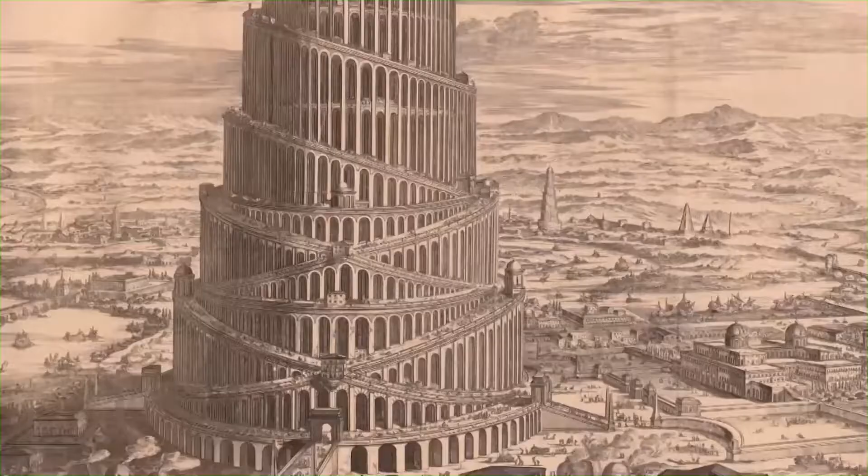Today, the world has 3 mega skyscrapers reaching over 600 meters, physical representations of man's eternal desire to conquer the sky. From the Tower of Babel to the Burj Khalifa in Dubai, the creation of high-rise constructions has been unceasing. Richard Taillé is a physicist. He went around the world to research the subject, asking the expertise of engineers and scientists driven by their desire to reach for the sky.

How were the Egyptians able to build pyramids that dominated the world for nearly 4 millennia? What were the methods of cathedral builders? How did engineers make use of scientific models to design emblematic monuments? Richard Taillé takes us on a vertical journey in the footsteps of those who set out to conquer the sky. To understand how over the centuries men have been able to defy and then master the laws of physics as they build higher and higher.

His investigation of man's race for elevation took Richard Taillé to Egypt. At the edge of Cairo, on the Giza Plateau, stand the pyramids. The Pyramid of Khufu, the largest, remained the tallest structure in the world for nearly 4 millennia. What expertise was available to the Egyptians when they built these monuments? It's a mystery that continues to fascinate scientists and Egyptologists such as Pierre Tallet. With him, Richard Taillé visited the pyramids, the last remaining monument of the 7 wonders of the world.

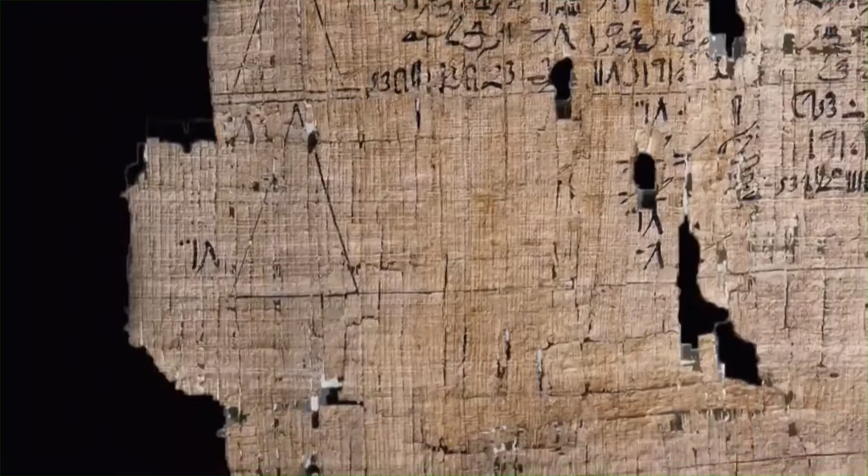We know that the Egyptians had the idea of proportion and used a small triangle. Using that small triangle told them where to place the next stone. The small triangle and the pyramid were similar triangles, as we say today. And this similarity is found in all of the pyramid slopes in the Rhind papyrus.

How can we not wonder what methods were used to build these colossal stone constructions? From the foot of the pyramid, we can really see the blocks. I mean, they're huge. People have an image in their head of armies of slaves working on the pyramids. Is this impression correct? Not really. Certain films have popularized the idea of slave people working on pyramids. Nothing is further from reality. The more documents we find, the more we realize that the work was remarkably well organized by the Egyptian monarchy, and that the workers were craftsmen chosen by the king. They were well fed, well paid, and employed on a yearly basis for their skills.

And according to the American archaeologist Mark Lehner, since it took 2.3 million blocks to build the Pyramid of Khufu, we can estimate that they made an average of 350 blocks a day over the 27 years of Khufu's reign. A team of 800 men is capable, over such a long period, 27 years, of carving all the blocks that made up the pyramid. By making these extrapolations, we've concluded that a team of about 5,000 at the most would have been perfectly sufficient to construct the entire building.

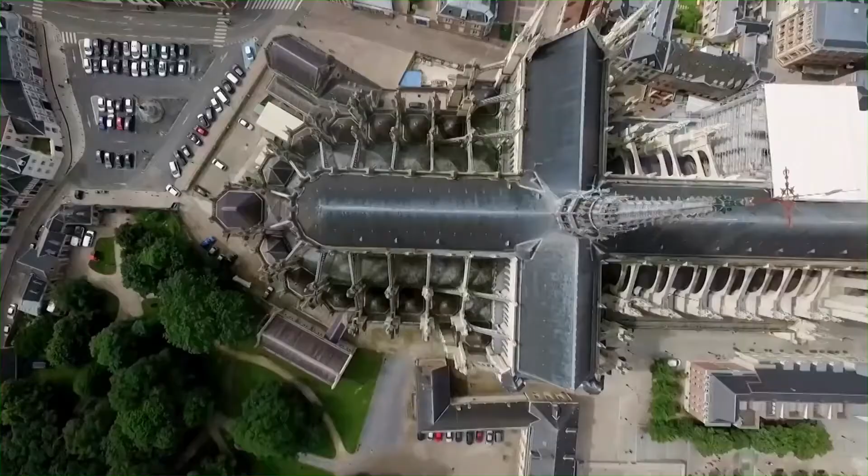As a physicist, when I see the columns, the mass that is above us, I try to reason in terms of force and mechanics. But I imagine that in the 13th century, these notions were not very well known. Exactly what kind of theoretical tools did they have at the time for constructing these cathedrals? In terms of theoretical tools, they didn't have much. Mastery of the compass, the set square, the ruler, very good drafting methods, and the right materials. They used the right stone in the right place.

Empirically. Very empirically. Just by weighing a stone, they knew its density. And they put the heaviest stones on the bottom, the lighter ones on the top. When we make sophisticated calculations today, we realize that these structures are oversized from today's viewpoint because they didn't calculate the size at all. But pillars like this could bear maybe 20 or 30 times the load they currently carry.

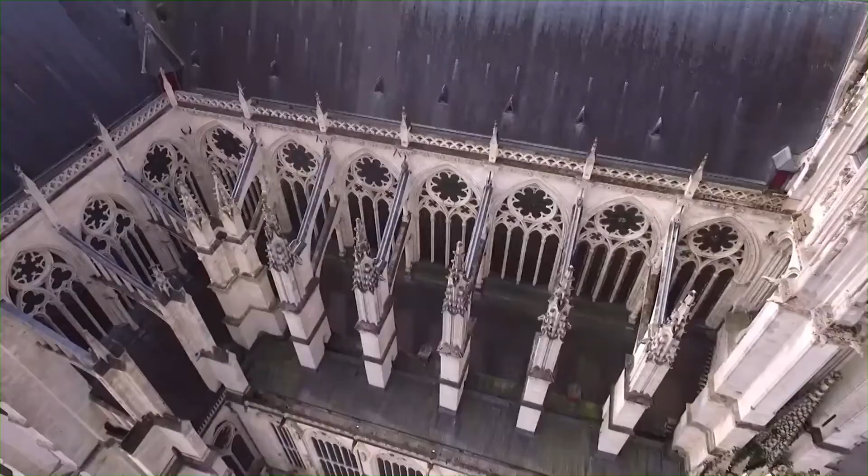Few or no theoretical tools. As for the construction tools like the plumb line or the arithmetic rope, they remain astonishingly simple in light of the scale and the complexity of these stone constructions. Well, let's try one of these so-called rudimentary tools. We're going to make a right angle with this rope that has 13 knots. 13 knots. We're going to make a triangle with one side, that's 3 units. 1, 2, 3. 4 units here. 1, 2, 3, 4.

So if we calculate this on paper using geometry, a triangle with these proportions should have a right angle here. It's the Pythagorean theorem, but the medieval constructors didn't know this theorem. However, they knew that when a triangle has one side that's 3 units, another 4, and another 5, it's a right triangle. So that gives us a right angle. And it can also help to make horizontal lines. If the vertical line here is aligned with this side, it means that the bottom is horizontal.

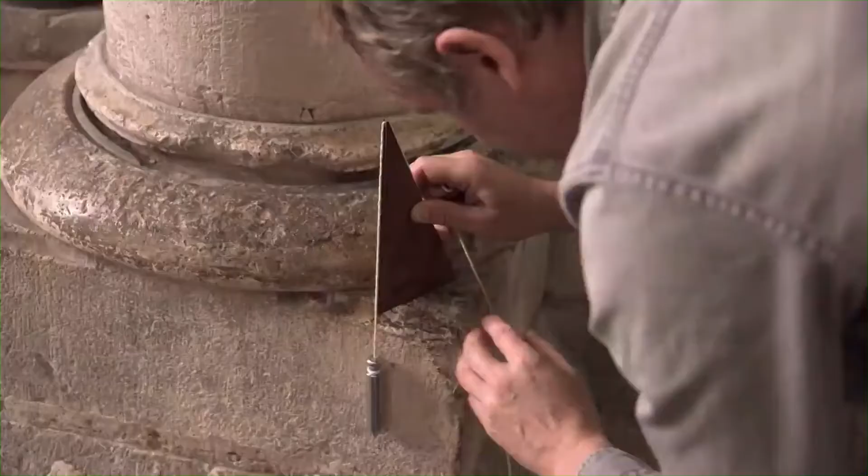Yes. Let's try. I'm a little intimidated. It's my first time using this medieval tool. Here we go. I'm putting it on the surface. And yes, it's horizontal. It's remarkable. So I tested the horizontality of this part of the cathedral. The builders did a good job. We can see that they managed to build something massive and durable using a relatively simple tool. And that 800 years later, with maintenance, it has remained sound.

But not all cathedrals have been so lucky. A few kilometers away, Saint-Pierre-de-Beauvais has had a turbulent history. It should have been the highest cathedral in the world, but the builders' plans were foiled by the laws of physics, leaving it unfinished. Jean-Lucien Guenon is the heritage officer who watches over it today.

So we're entering the cathedral at what should have been the main entrance if the nave had been built. And we can see the size of the aisle and the choir with its Gothic architecture in front of us. The Bishop of Beauvais, who decided to rebuild the cathedral in 1225, wanted it to be the most magnificent, tallest, and largest cathedral in Christendom. So the vault is 48.50 meters high, the tallest vault ever built.

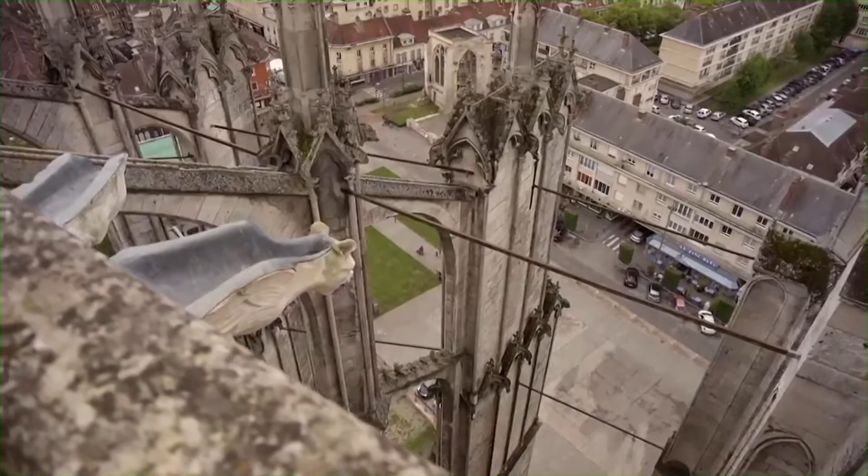At the time, Saint-Pierre-de-Beauvais benefited from advanced technology. It was reinforced with iron. Its arches were supported and bound together with metal tie rods, but this precaution would prove insufficient.

The choir suffered some unforeseen events. It was completed in 1270. 50 years of construction. And in 1284, some external flying buttresses broke, causing certain arches to fall. It didn't completely collapse, but nevertheless, as a precaution, the reconstruction included a new column in each span.

And that's why it's a very small space. So 3 new columns were added, in between the 13th century columns. All right. Each arch is therefore divided in 2 and supported by an additional column.

We're going to see the upper parts of the church now and look at the tie rods more closely. The stairs are very steep. Here we are. Okay.

We have a good view here of the cathedral's 13th century architecture and the differences between the original structure and the reconstruction that took place in the 14th century. So we can see this buttress column that is very streamlined, but has a large surface area for the wind.

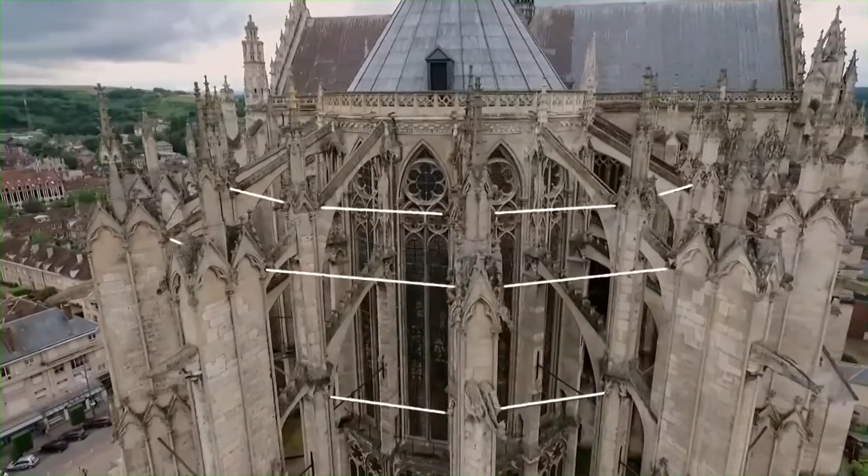And if we move forward, we see the structure of the tie rods. They're iron bars that crisscross. They're iron bars that connect everything so that the structure is held together if there's movement. Okay, it keeps everything in place. The continuity of the chain is the important thing. One wouldn't be enough.

The evolution of Gothic architecture, with its unprecedented successes and spectacular catastrophes, is studied in many universities, including the United States. Richard Taillé headed to New York. He went to meet with researchers from Columbia University who are studying French cathedrals using modern scientific tools and have created an index of all of them.

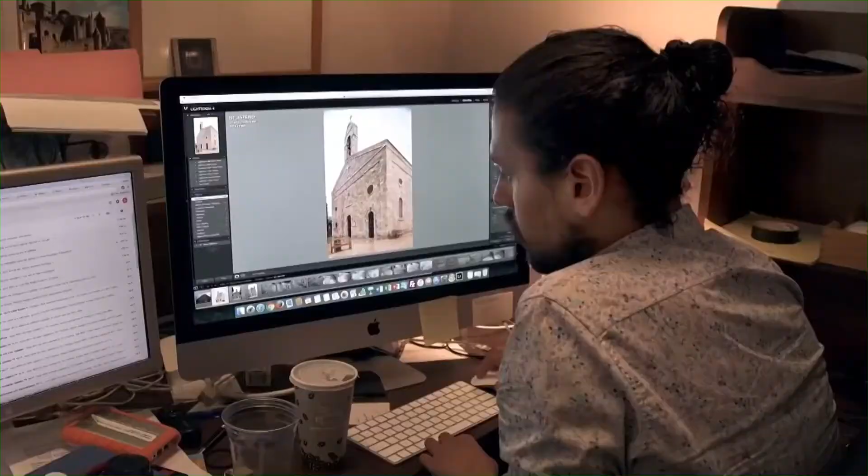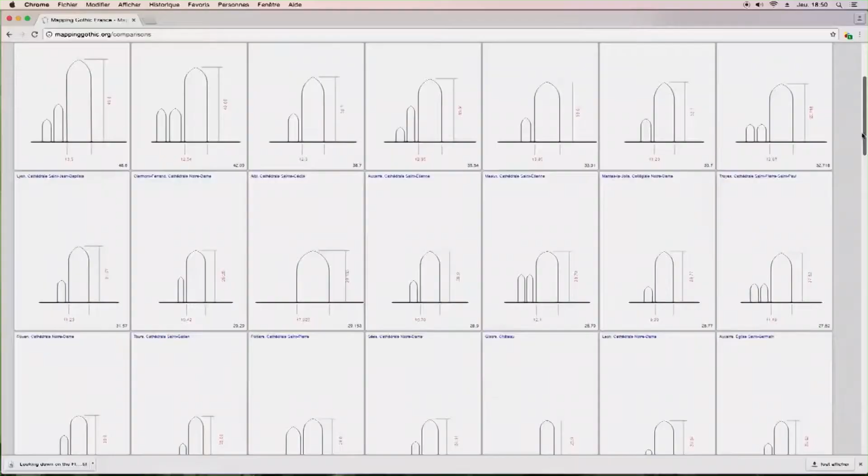Stephen Murray and Rory O'Neill have developed digital tools to better understand Gothic architecture, first off with a huge database called Mapping Gothic. What's particularly interesting is here that it's arranged by nave height, but we can also arrange by approximate construction start. So here, okay, this shows the height.

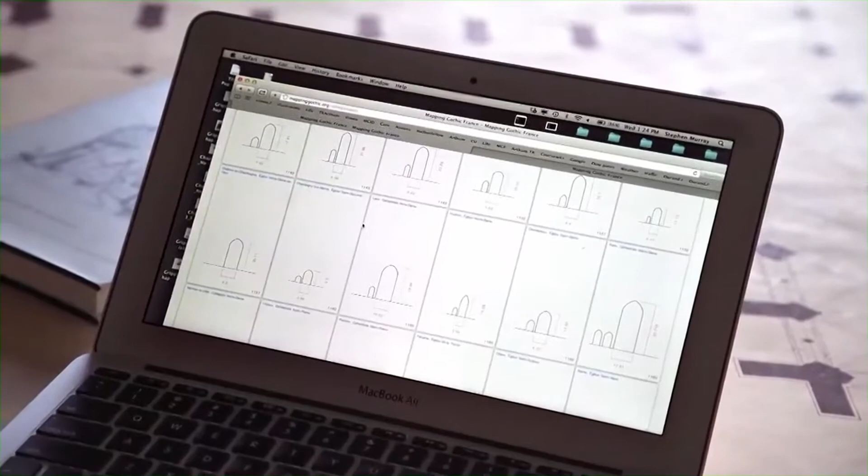So here we are in the year 1000. One can look at the heights of buildings changing, and you don't see a huge amount of difference in them. The great breakthrough of all the cathedrals is Notre-Dame de Paris, and it was the first building in Northern Europe that goes beyond 100 feet in height. Amiens, 1220, and here comes Beauvais, 1225.

Why did it happen at that particular moment? I would suggest the answer is not simple. What you're dealing with is a period when the clergy, the bishop, are receiving huge amounts of money from agrarian production and industrial production in the cities and mercantile exchange. So to make a building very tall like Amiens or Beauvais, the technology was possible only because they had the resources to do it.

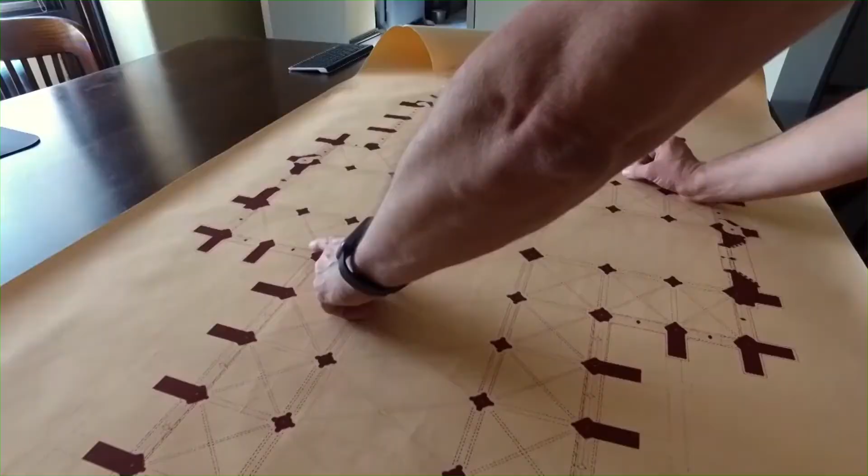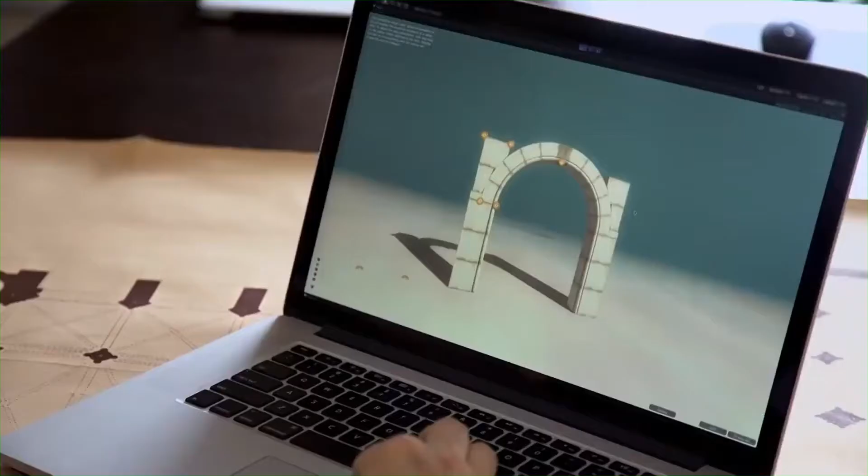To experience in real time the challenges of the cathedral builders, Rory O'Neill developed a digital simulation, a sort of scientific construction game. Yeah, the relevance here is to build an appreciation, an intuitive sense of what the builders were challenged with. They wouldn't be sure of how the blocks would behave until they put them up there. And so we can put them up there more quickly in this simulation because each block is behaving as it would. So we have the ability to vary the sizes of the blocks and their configuration in real time.

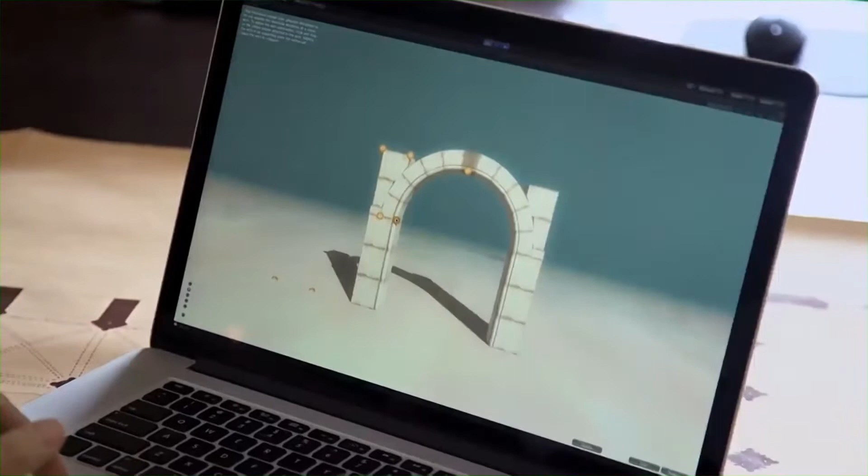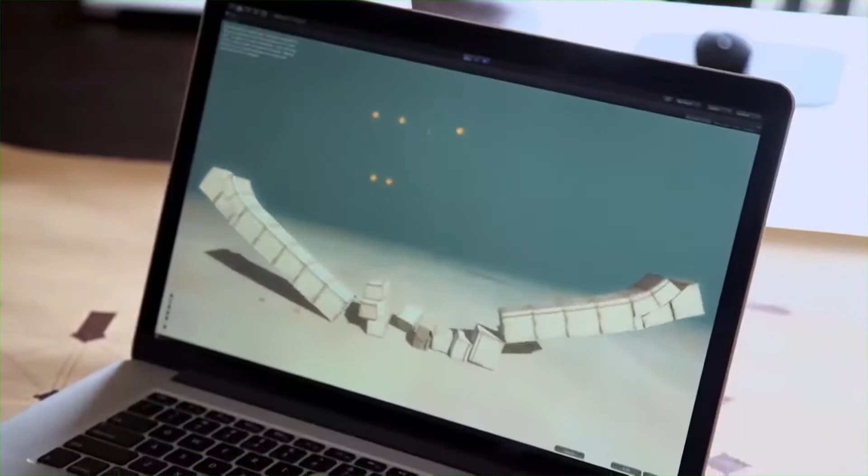As we try to make this structure taller, we've got the same outward force with this trying to fall and pushing these out, but because these are taller, it's got more leverage to push these things apart. Okay. And so height, the quest for height here, is limited to some extent by the ability to vault the space. So what we can do is certainly add more support on the sides, more buttressing. This holds? And this holds.

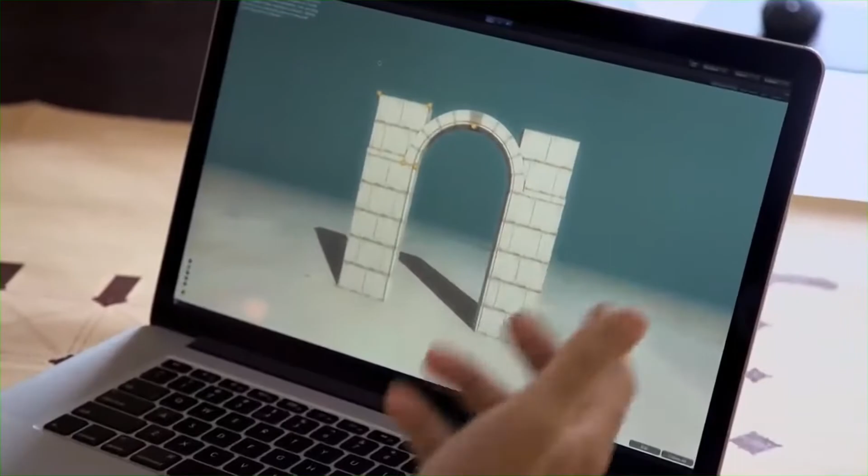Okay. But this is expensive. Here we've got a lot more stone that has to be quarried. It has to be brought too. Well, somewhere Islamic builders came upon the idea of breaking the arch.

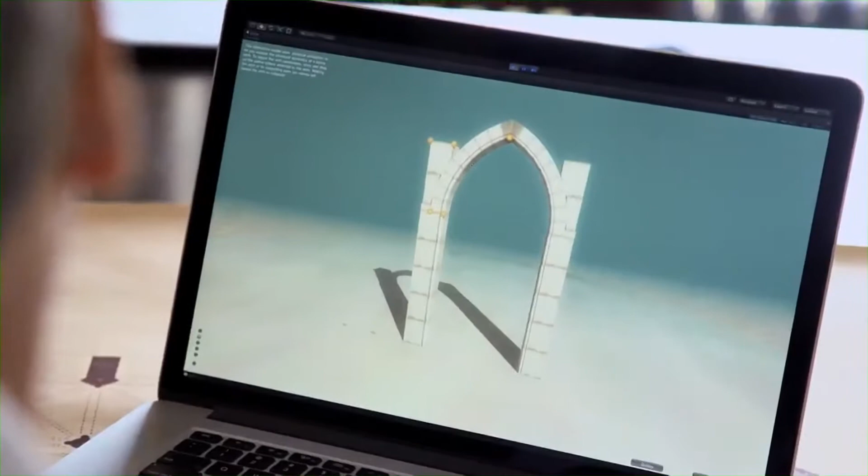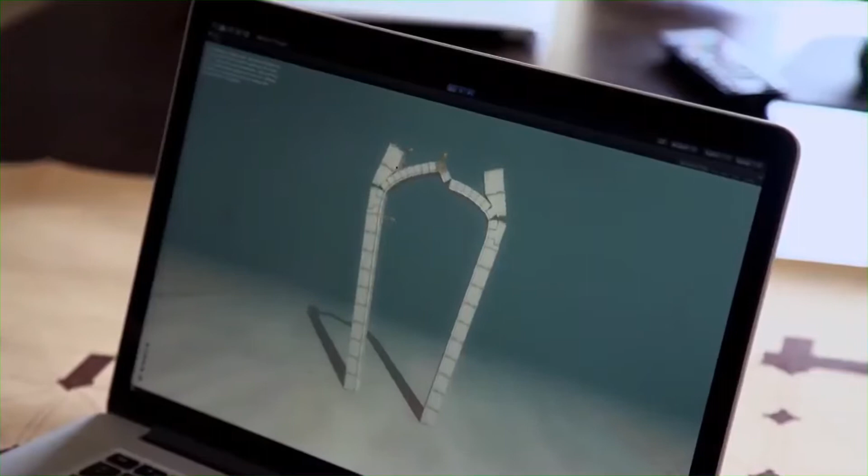A broken arch, an arc brisé. Arc brisé, d'accord. And whether or not this was done for aesthetic reasons or structural reasons, we don't know. However, it does help. Yeah, it works. Because it's bringing the load more directly to the ground. And certainly, because of the structural benefits, we can start going a little higher and try to make this taller and taller. At some point, this will also fail. So everybody stand back. So here we've got a failure of the structure in static loading.

But as we get larger to hold more congregants, a growing city, we need to come up with some other solution here, what we know as flying buttresses. So I think maybe even you could give it a try. Okay, let's go. It's Richard's turn to try his hand at cathedral building and to experience the humbling challenges of the quest for height.

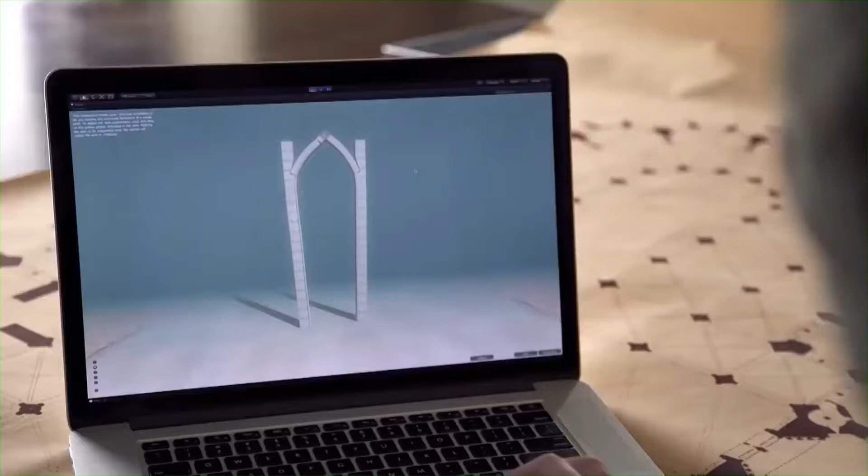Et avec moi, enfin, je... I don't want to brag, but mine's holding. Oh là. J'ai parlé un peu trop vite. Okay, I spoke too quickly. Celle-là, elle tient pas très... It didn't last very long.

Even seismic engineers today are still learning from these masonry structures because their simulations are not as accurate as the buildings themselves. So for the most part, seismic engineers are looking at these medieval masonry buildings to learn how to build better today. For several centuries, the race for height remained the domain of the sacred. The highest cathedrals in the world, Ulm at 161 meters and Cologne at 157 meters, both in Germany, would only be completed in the 19th century.

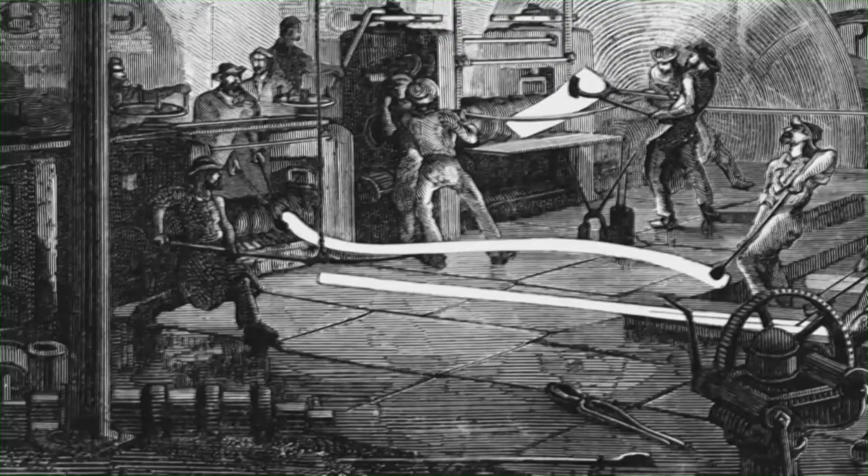At the beginning of the Industrial Revolution, the concept of technical prowess surpassed that of religious will, giving new momentum to the conquest for the sky. The engineers performed what were miracles for that time, exploiting new materials. The steel industry was rapidly developing. First iron and cast iron, then steel, would become the primary metals used in construction. Soon, the first skyscrapers were born, thanks to a tragic incident.

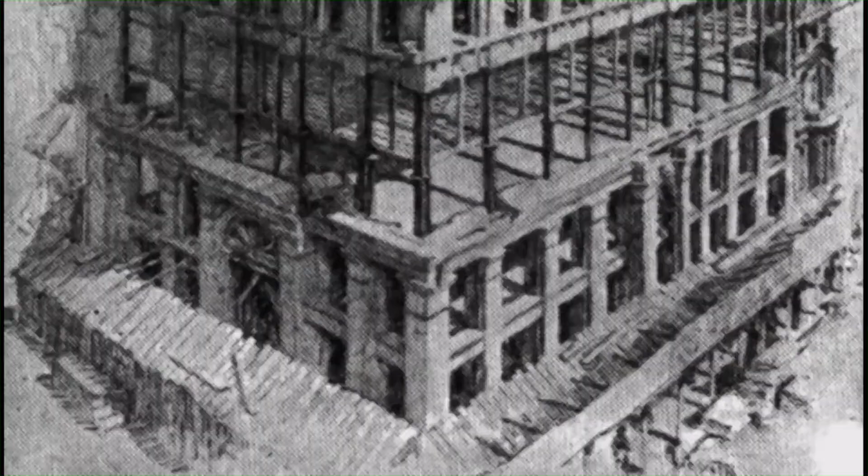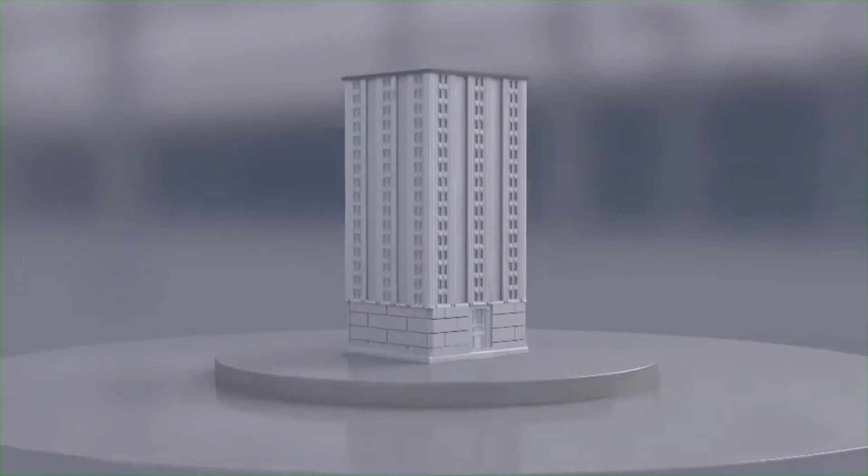And so the first skyscraper was born, the Home Insurance Building, designed by the architect William LeBaron Jenney. He said that his goal was a height to rival the Tower of Babel. But apart from the height, it was the construction technique that was truly innovative. In traditional masonry, the load of the structure is supported by the walls. The more height, the greater the forces that are exerted. Hence the need to build thick walls. For example, a 16-story building in Chicago has walls that are 1.8 meters thick at its base.

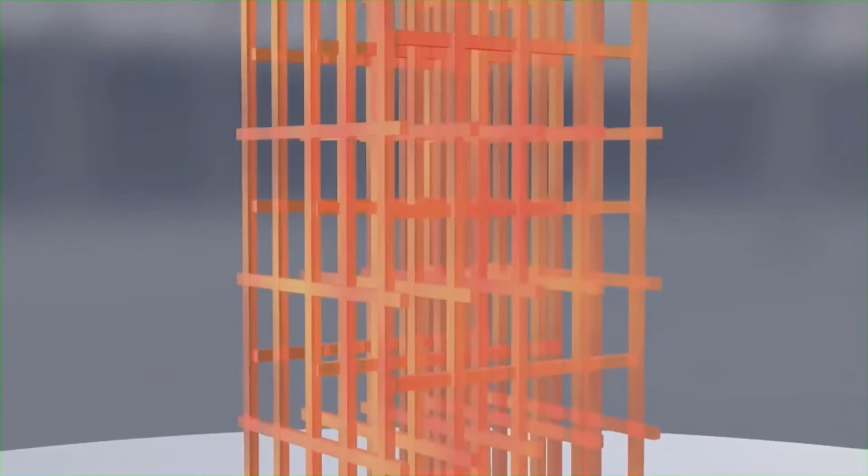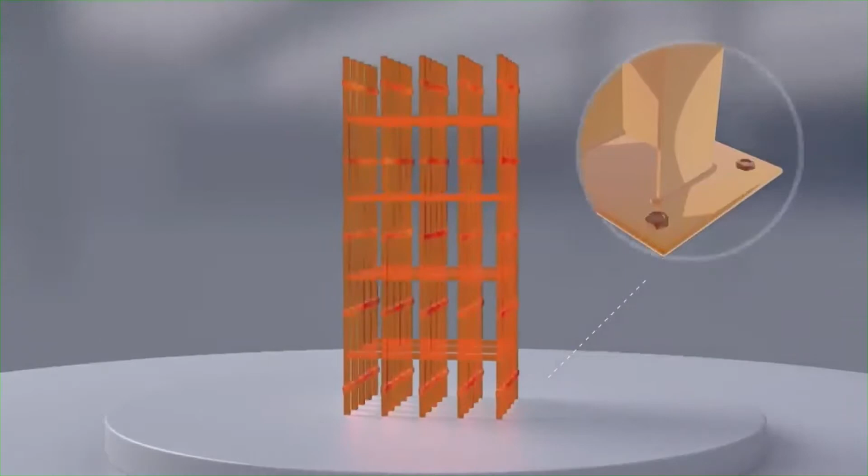But thanks to the invention of the metallic structure, buildings were able to become lighter and therefore higher. Traditional masonry was replaced by a skeleton of metal girders with the framework connected by rivets. This supports the weight of the building and allows the entire structure to be lightened considerably. Thanks to this new technique, man would be able to set new records in its conquest of height. There was much new terrain to conquer, and soon a rivalry began in the United States.

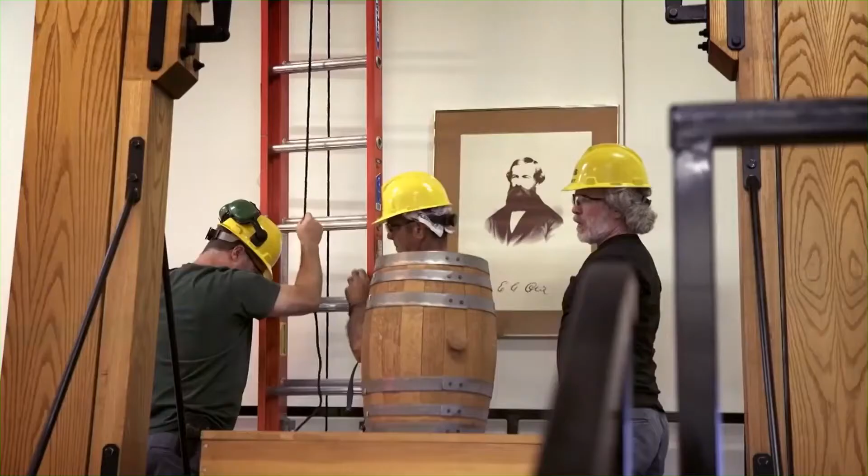None of this would have been possible without a crucial invention, the elevator. Elisha Otis, an engineer, made the discovery around 1850. Here it is, the test tower. To find out just how revolutionary his methods were, Richard Taillé went to the Otis Research Center in Connecticut, where he had a historical experience. 28th floor.

Welcome. Bienvenue. Bonjour, merci. Richard. I am Rick. Okay. You'll need to wear a hard hat, safety glasses. How do I look? Wonderful.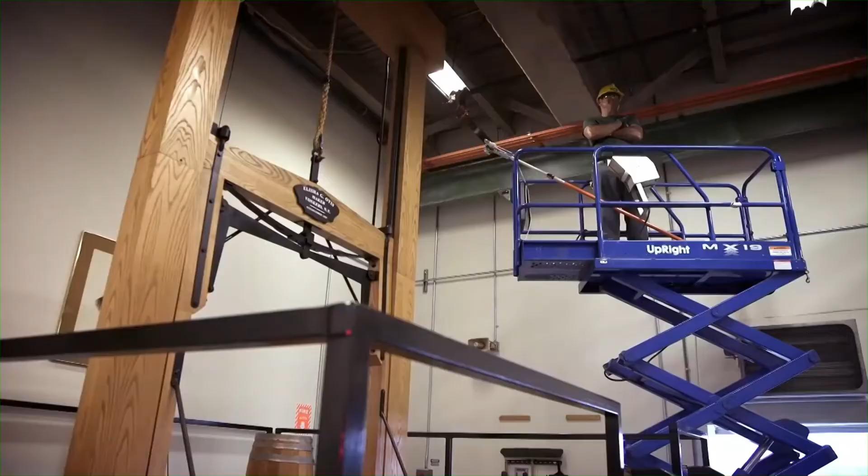Très bien. Well, I didn't expect to see a wooden device like this here in the middle of this big tower. So that's actually an elevator. This is an actual lift. In 1853, elevators were used for freight goods. Okay. And if the rope broke, the platform with the goods would fall, damaging the materials being manufactured. Elisha Otis, who was the building engineer, said there has to be a better way. How can we prevent the platform from falling?

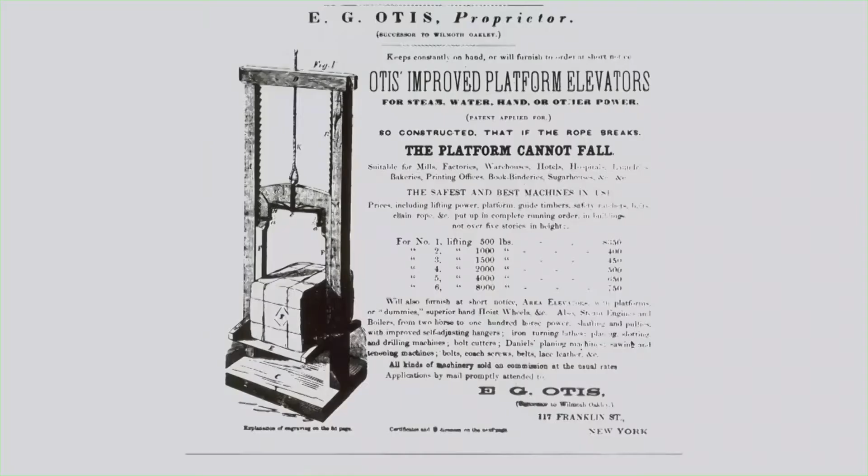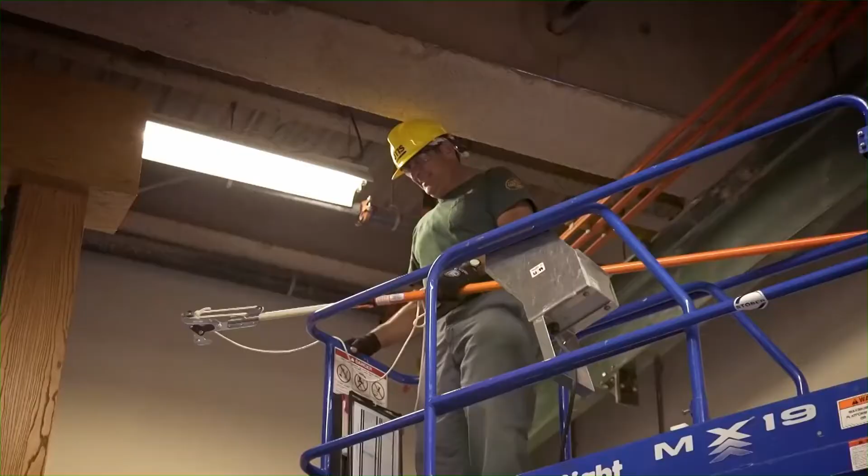So if you look here, you can see the spring. That came from a wagon. Okay, so he took something that already existed, the mechanism that has been used in trains. Yes. And what he developed was an ability to stop immediately the platform falling down if the rope broke. Would you like to try? Yeah, let's go. Here? There you go. Okay. So let's raise the platform. Right, so that's pulled these two in.

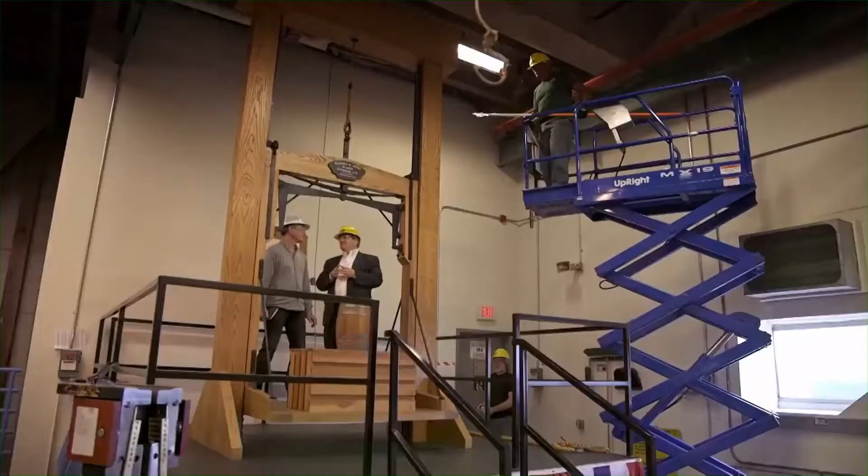Okay, here we are. We say cut the rope. The tension will be released. It'll push the pawls into the ratchets, and we're going to come to an immediate stop. 3, 2, 1. Cut the rope.

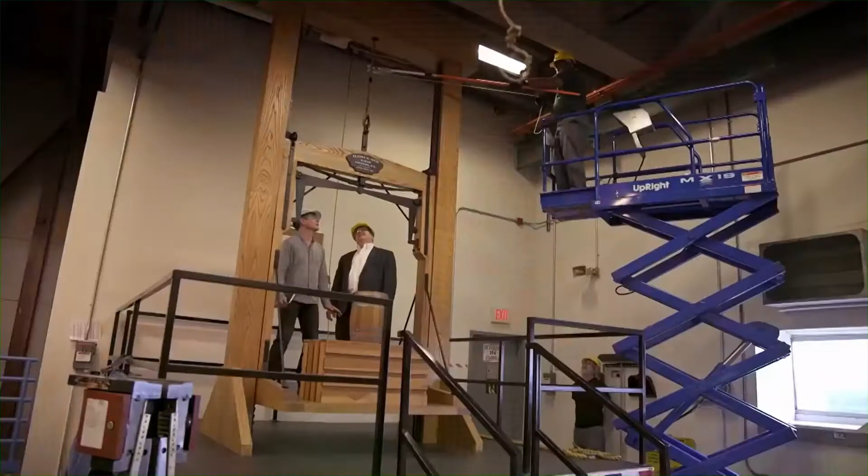Wow. I felt it on the knees. Yeah, absolutely. So in 1853, when Elisha Otis had his assistant cut the rope, he doffed his hat and said, "All safe, gentlemen, all safe."

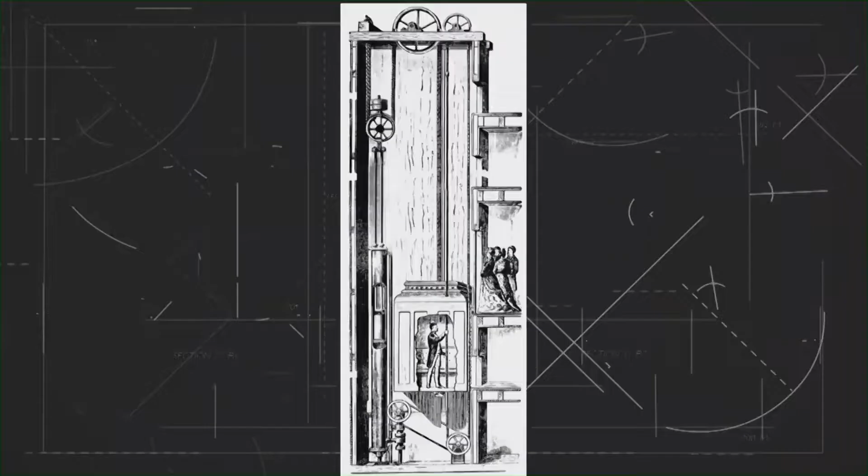4 years after this impressive demonstration, the first passengers would confidently ride in the elevator that Elisha Otis installed in New York. Elevators remain the subject of intense research today, but they have allowed, since their invention, the true conquest of the sky to begin. A bitter competition where science clashes with pride.

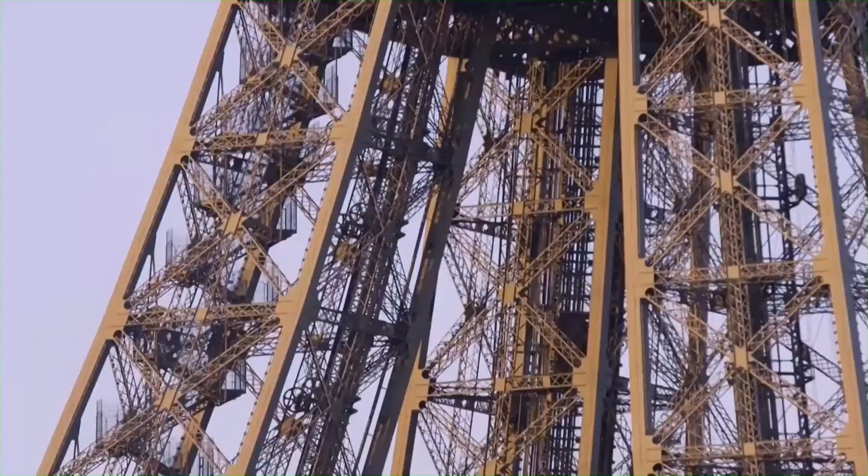Five years before the World's Fair, which was to mark the centenary of the French Revolution, Gustave Eiffel and his engineers had the idea for a 300-meter tower that would represent the country's rediscovered power and demonstrate its technical prowess.

Hello, Monsieur Lemoine. Hello, Richard. It's nice to meet you.

Likewise. So you're a specialist of the Iron Lady. Here's this beautiful tower shining under a blue sky on this clear and sunny day, which brings out its graphic lines, its lightness. The structure is 300 meters high, making it the tallest building in the world when it was built in 1889. It was really a visible marker of the technical and scientific accomplishment of the 19th century.

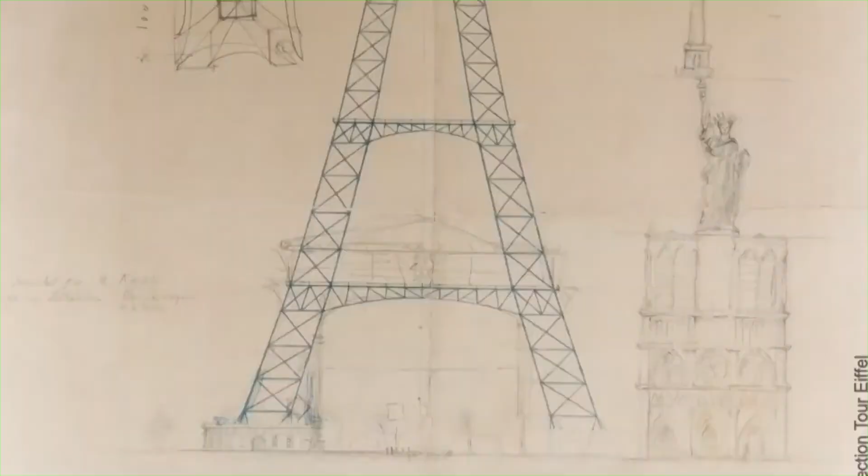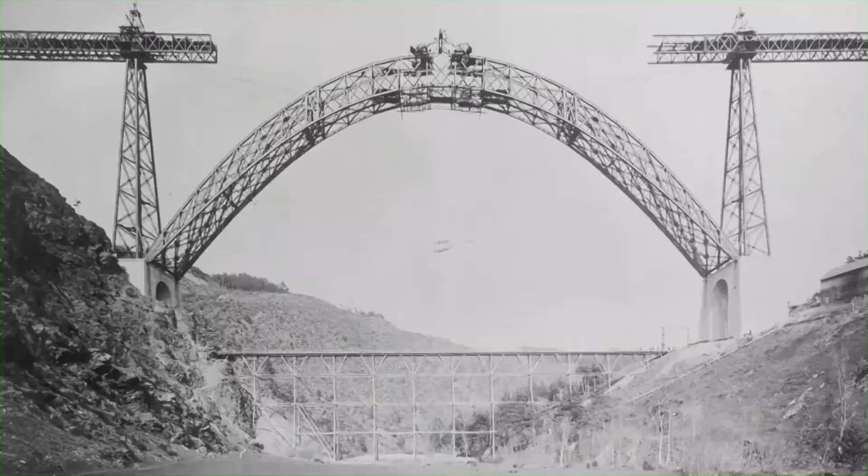And how was the Eiffel Tower designed? Was it an idea that came from Eiffel? Or was it a commission made for the exhibition? The tower was conceived by two engineers, Émile Nouguier and Maurice Koechlin, who brought the idea for a 300-meter tower to Eiffel in 1884, based on the bridge columns that the company already knew how to build. This would, of course, be both the highlight of the Universal Exhibition of 1889 and also the great achievement of his career.

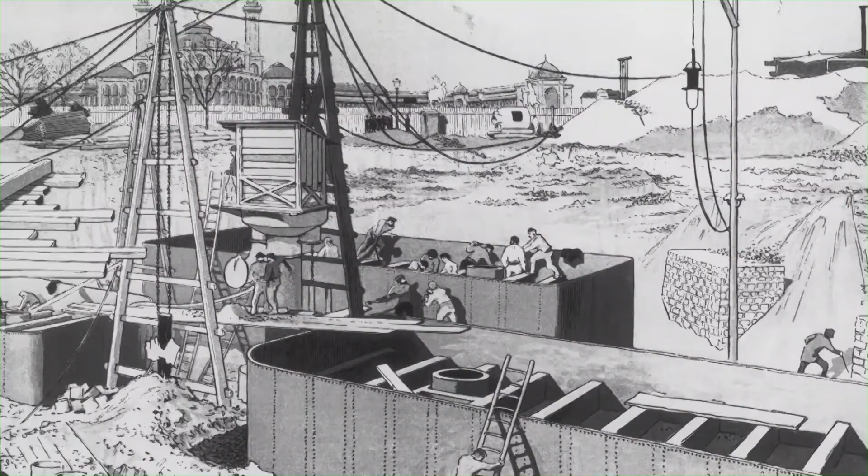So now we're at the square under the columns. We can see that they're leaning inwards. How did it stand up before the first floor was built? The challenge was to start the tower. They began by building foundations, and then the slanted columns. To hold them up, they just used wooden scaffolds, the same that were used when building cathedrals. They started with 4 columns, and it rose from there. The critical point was reaching the platform area on the first floor.

We shouldn't forget that they were assembling sheets of metal pierced with holes, which had to be adjusted precisely before putting in the rivets, down to the millimeter. From there, it was a kind of giant meccano that could be gradually assembled. In less than 2 years, the tower was built, to everyone's surprise. Let's go and take a look from above. Let's go up.

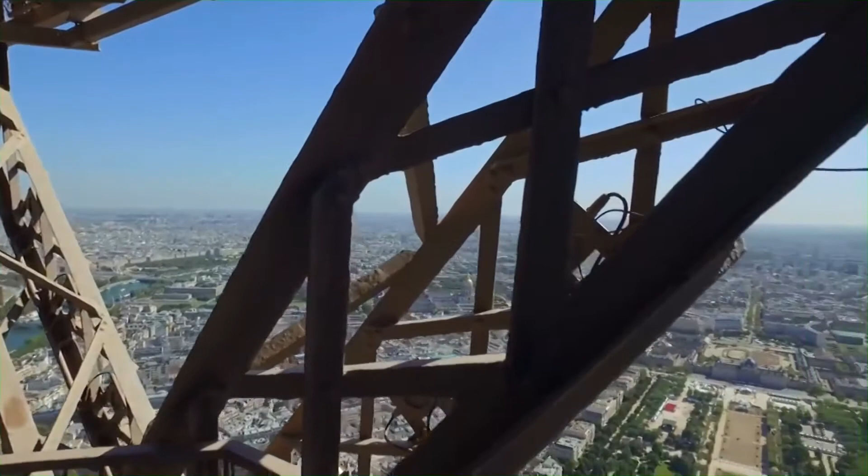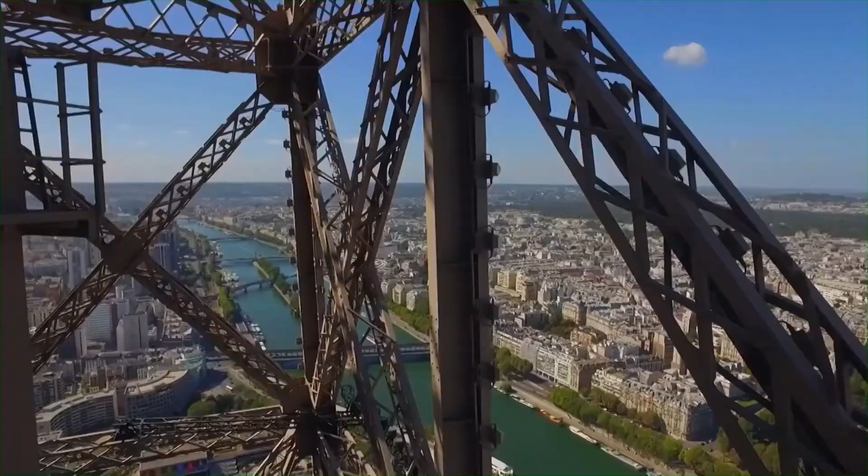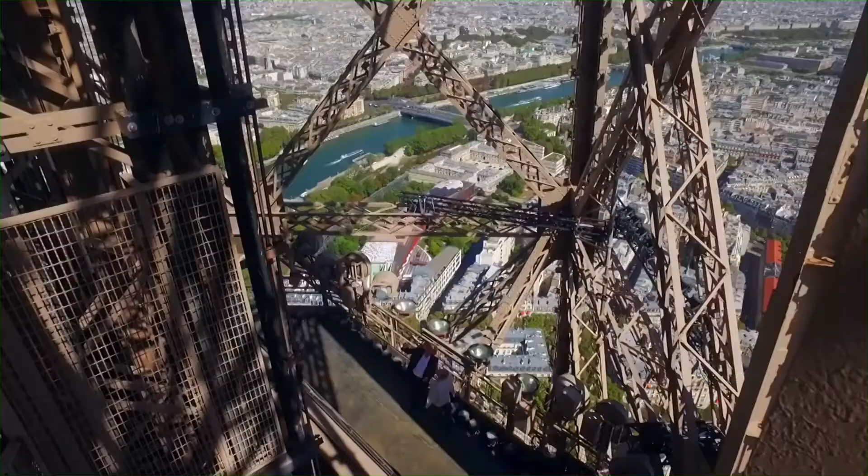Here we see the structure really well. A view of a void. We're in between the second and third floor, about 250 meters high, and we see that there's not much holding the top of the tower. There are open-work girders. In total, the tower weighs 7,300 tons. It's very lightweight for a structure of 300 meters. But it has been strategically designed to withstand the wind.

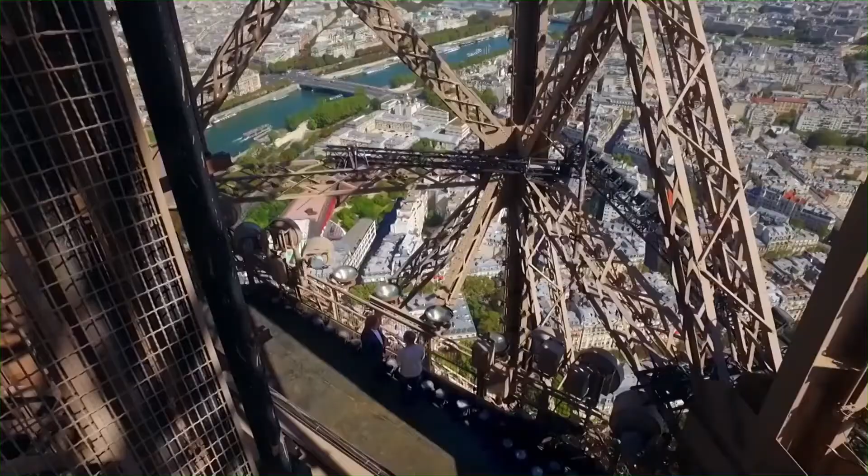The wind creates pressure, several hundred kilos per square meter, which could topple the tower. So they gave it a slightly curved form, which causes the horizontal force of the wind to combine with the vertical force of the tower's weight, giving a resulting force exactly in the axis of the columns. So the shape doesn't come from the architect's imagination, but from a mathematical calculation. The shape comes from mathematics, but that's what gives the tower its visual identity, precisely because it's inspired by scientific studies and not by the classic rules of architectural composition. Okay.

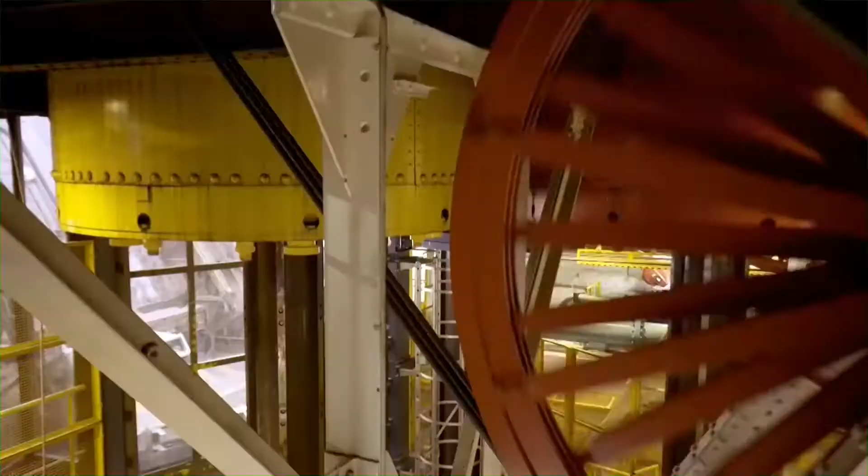From June 1889, visitors to the tower could safely reach the top thanks to elevators, a real technical feat at the time. Here we go, we're going all the way to the top, from the second to the third floor. We have an incredible panoramic view from here. For 40 kilometers away, it is stunning.

So in 1889, Parisians could come here and see the very same view. For the first time, they had the chance to go up 300 meters in the sky, and it was a real novelty. And it wasn't just a small group of people who came, but 2 million people. And they weren't afraid to climb to the top of this great iron tower? It was a very unusual opportunity. They weren't familiar with mountains or altitude.

A lot of people must have had vertigo, but it was also perhaps a way of warding off their fear, saying to themselves, I'm 300 meters high and I'm safe on this small platform. It showed that one believed in the idea of progress, which was strongly valued at the time by all of the citizens. In any case, I feel safe on this platform. No problem. I'm not afraid of falling.

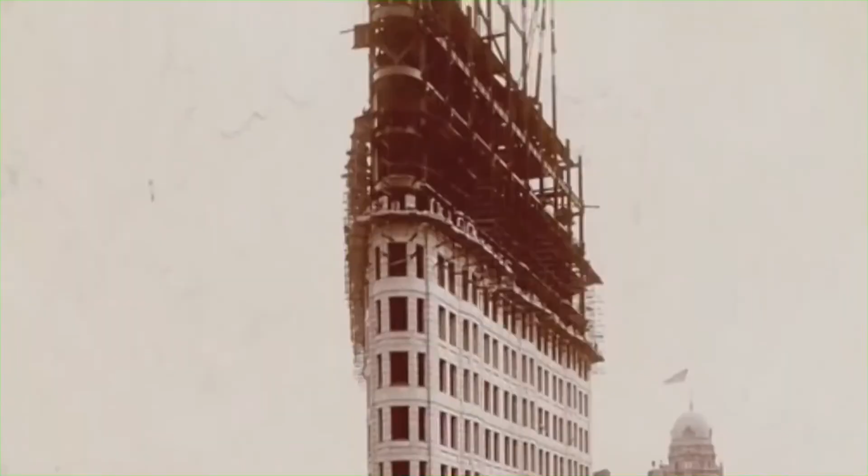So it's a building that comes to a point like a lady's iron, although we might call it a piece of cake. Yeah. A very tall piece of cake. But I guess it's not a piece of cake to build. No. That was a nightmare for engineers to work on. The problem they had was the site, trying to get the flanges to work on this narrow corner. But this is a skeleton steel construction with terracotta fireproof design and cladding. So this is a full skyscraper. It has all the characteristics that are needed to make what we come to call, after the 1880s, a full skyscraper.

From the early 20th century, every bank, newspaper, and insurance company wanted its own skyscraper. It was a way of gaining exposure for their brand and asserting their reputation with a powerful symbol. Buildings of greater and greater heights sprung from the ground until one of them came to dominate the world for quite some time. We're on Fifth Avenue, 34th Street is here, and right up there is the Empire State Building, the world's tallest building for many decades.

Wow, what a beautiful lobby. And what about this picture here? Now, this is wonderful. A big image of the building itself. There it is. A building that sets back under the zoning law of 1916 in a very dramatic fashion. In 1916, after 20 years of people arguing about how big these buildings are, New York City passed a zoning law which basically says that the building starts with a base, sets back at a certain mathematical formula, goes up and allows people to still be bathed in light and not feel that they're down in an elevator shaft.

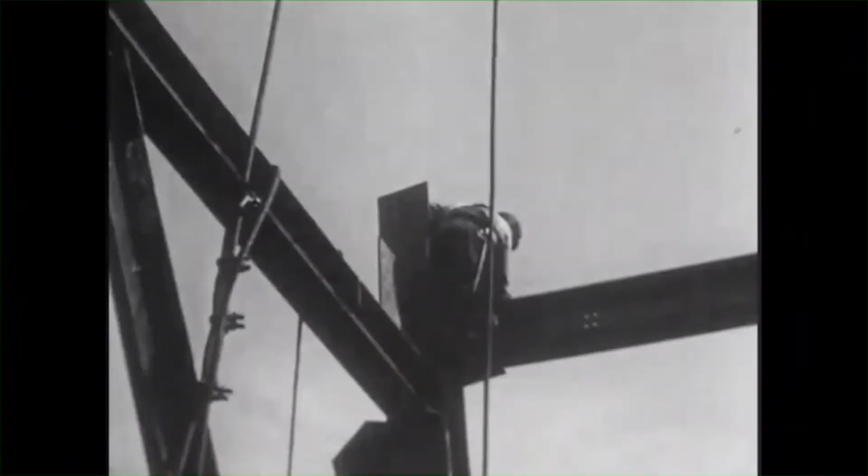The Empire State Building, with its distinctive silhouette, is the ultimate model of the 1916 law. And it was built at the frantic pace of 4.5 floors per week. It was a construction nightmare. And you know, it involved riveting huge girders in the middle of the sky, looking out on nothing. Now, I don't know whether you've ever seen the... Oh, pictures of the construction workers. The thought of it terrifies me. But the special people who do it are Mohawk Indians from Canada, and they were able to get out on those girders and do it.

And this building was finished in 18 months. It was finished May 1st, the traditional moving day in New York City. The building was ready on May Day, 1931, and the building flopped. That initial commercial failure did not, however, prevent the 381-meter-high Empire State Building from remaining the tallest skyscraper in the world for 4 decades.

One of the defining features of the Empire State Building is that it is mainly constructed from concrete, a 19th century innovation that gradually came to replace brick and terracotta. This material made it possible to reach heights that were unimaginable even a few years prior. Along with steel, concrete remains the primary material used in the construction of high-rise buildings today.

The higher a tower rises, the more it is subject to external forces, compression, traction, bending, twisting, and shearing, exerted mostly by the weight of the structure on itself or by winds exceeding 200 kilometers per hour. When subject to pressures that are too great, towers can bend to one side, swinging back and forth, twist in on themselves, and end up collapsing. So they have to be constructed with materials that can absorb these movements.

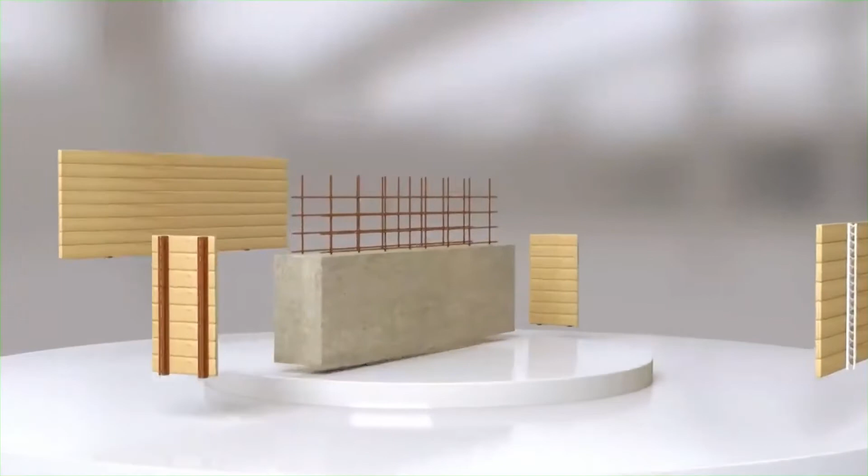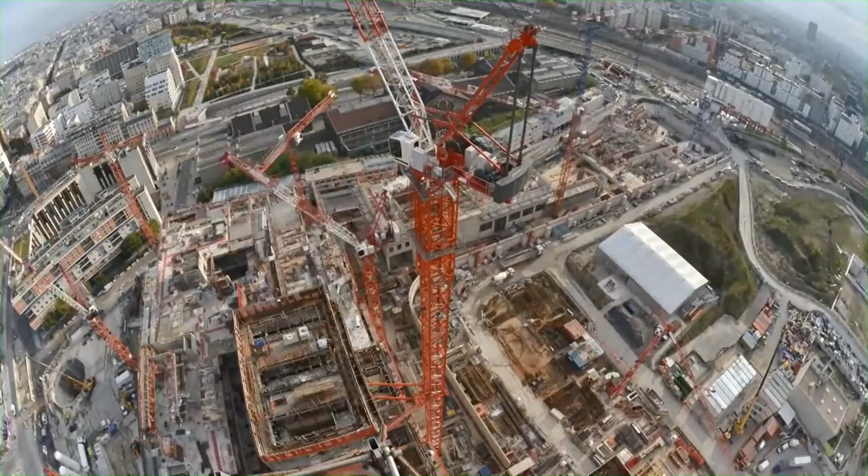Thanks to the advances made in the strength of concrete and also lighter materials and increasingly efficient engineering, the race for height gained new momentum in the 60s. The United States popularized the skyscraper, but the records they set were soon surpassed by Asia and the Middle East. In Asia, Shanghai, Singapore, Taiwan, and Kuala Lumpur, new high-rises were erected each day, with Hong Kong holding the record with over 1,250 skyscrapers.

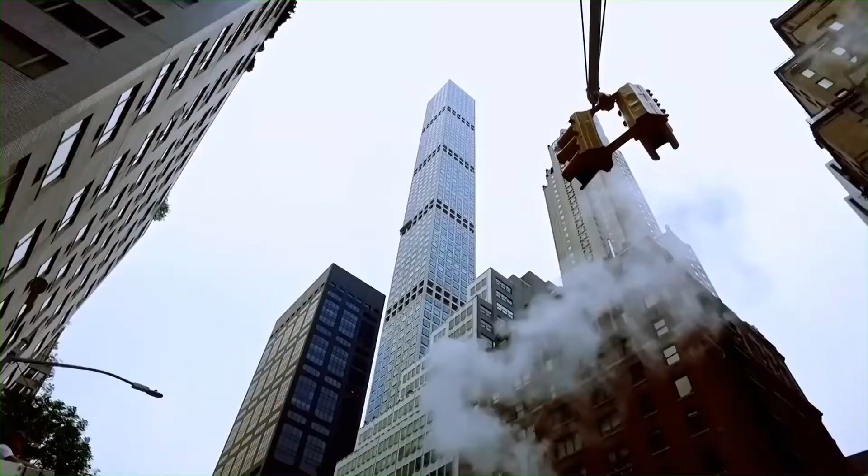However, we were seeing such extremes of height that super tall no longer caught the essence of the extreme heights that we were seeing being proposed. So that's why we introduced the term megatall, which is 600 meters and above. And right now there are 3 megatall buildings complete around the world.

The final step of his investigation led Richard Taillet to Dubai. Here he visited the tallest building ever made by man, the Burj Khalifa. 828 meters of concrete, steel, and glass, built in just 6 years. What scientific model did the engineers use to design this emblematic monument, this showcase of modern science? Richard Taillet received special permission to witness the internal workings of the skyscraper, to discover its secrets.

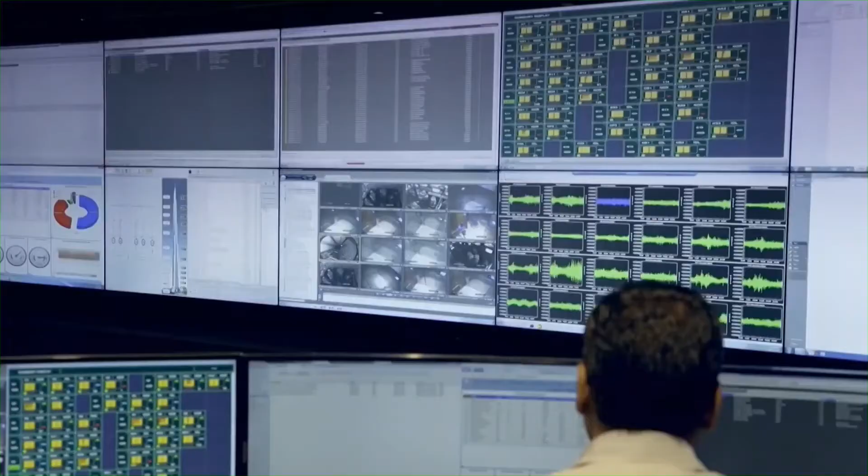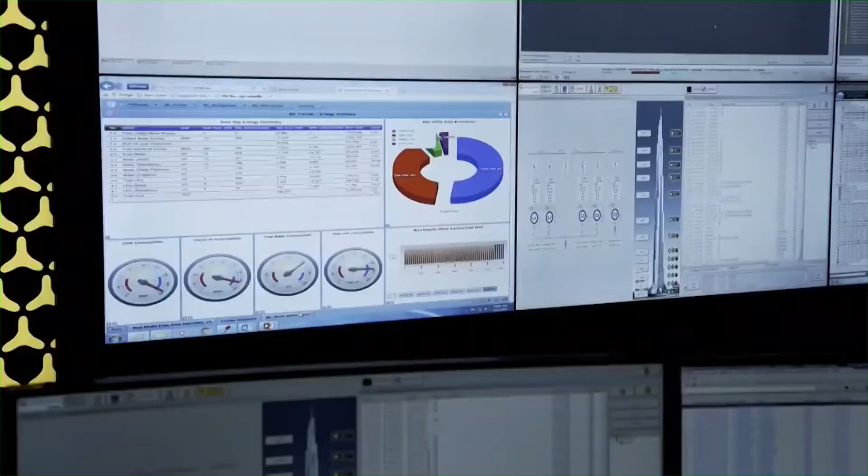The highest skyscraper in the world is truly at the forefront of technology. It is permanently under surveillance from an underground control room that Richard Taillet visited. This is the brain of our building. The brain, okay, le cerveau. From here, we get to manage and control and overlook all the operation of our equipment within Burj Khalifa. All the systems that we have in Burj Khalifa are linked to these screens: power supply, air conditioning, the structure's movements. A close eye is kept on every element to ensure the safety of this vertical city.

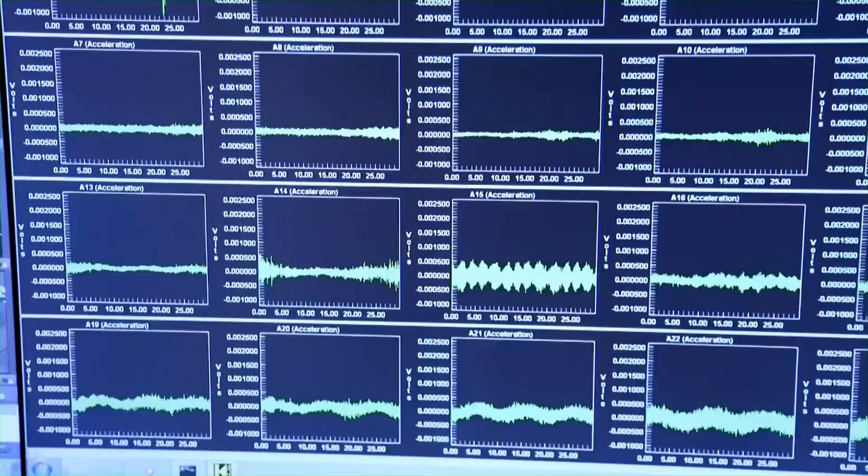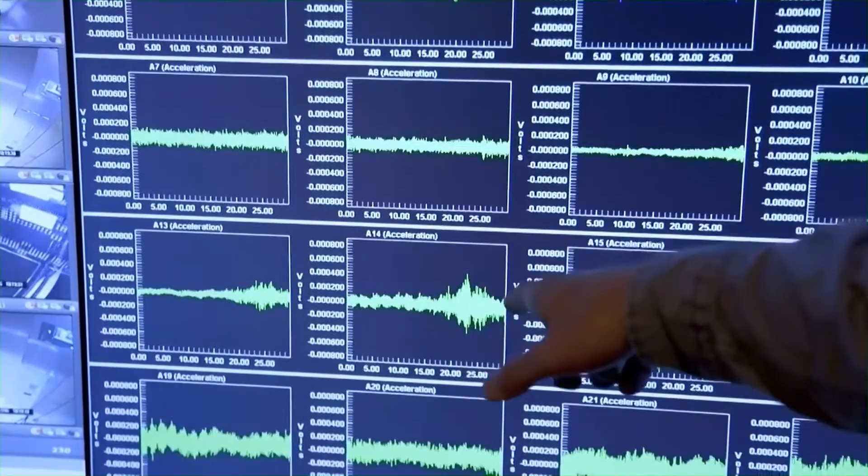I'm especially interested in this one with the small oscillations. Burj Khalifa is the world's tallest building, and it is acting like a big sail. And we need to always monitor its movement. So what you see here is the actual building movement as we speak now. As a physicist, I'm interested because I see acceleration marked here. So these are sensors that measure the acceleration of the tower. I imagine you can convert this acceleration into motion, into distance that is traveled beyond the equilibrium position.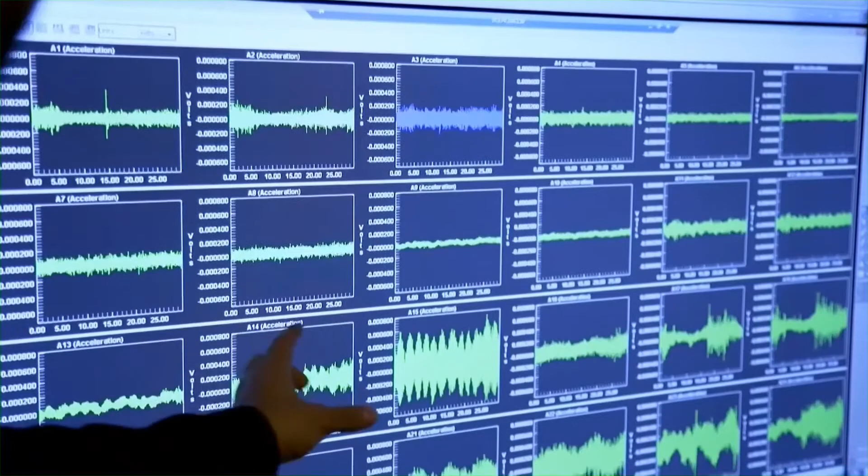Yes, the system has the capability to convert this into millimeters. Currently, although it's a bit windy outside, you can see there are spikes here, and that is in microns, so it is hardly moving a portion of a millimeter. The building is that stable. Due to wind, the building can tolerate a movement of approximately 2 meters in any direction.

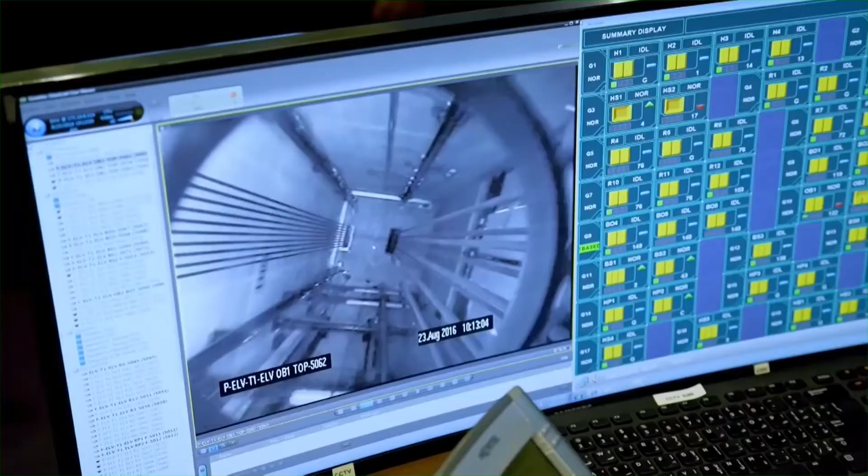Building a skyscraper over 800 meters high that can guarantee the comfort and safety of its occupants is a technological achievement. Its designers had to find solutions to problems that up to that point had only been theoretical. When you're designing these very tall towers, the main load you have to contend with is wind. It's not dead load, which is the weight of the building. It's not live load, which is the load of the people in the building and the furniture they put in.

What people don't realize is when wind goes past an object, and if that pulsing matches the natural harmonics of the building, you can get quite large forces. One of our goals of shaping the building was to get the shape which confuses the wind.

And the shape of the building, at the bottom, you'll be going into 3 wings, and by the time you get to the top, it morphs into a nose, like the front of a boat. And through this shaping, the wind forces went way, way, way down. The unique layout of the Burj Khalifa allows it to divert wind. But in structures with more classical shapes, there is another way to resist movement, even from earthquakes.

To limit oscillation, these skyscrapers have dampers whose principle is simple. It's a mass that moves mechanically to the frequency of the tower with a certain time delay, thus helping to stabilize the building. There are different kinds of dampers. Some are made from an enormous concrete block which must weigh at least 1/100th the mass of the building, placed at the top of the tower on a layer of oil and connected to the walls by springs. The mass follows the movement of the building, but with a delay due to the oil.

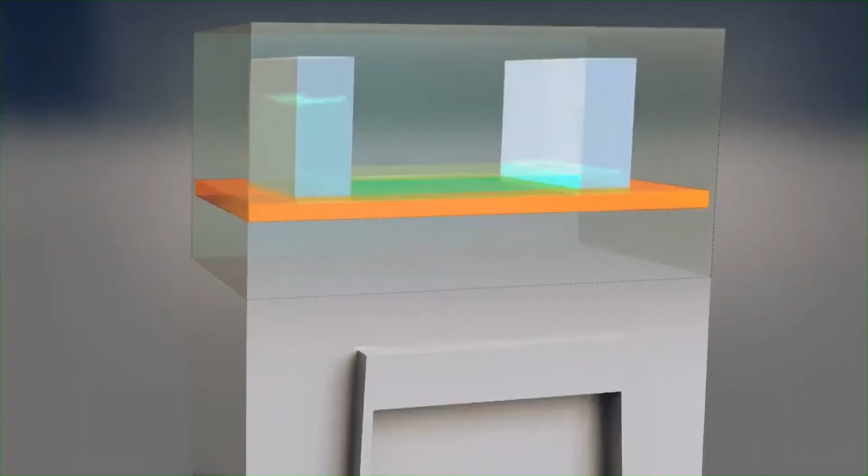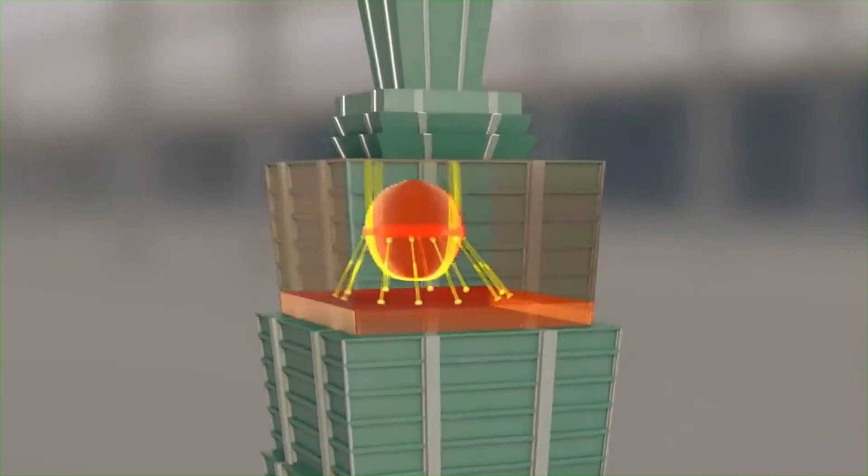In the case of the Comcast Center in Philadelphia, there is a hydraulic damper containing 1,300 tons of water that moves from one reservoir to another thanks to a motion sensor. But one of the most surprising dampers is found at Taipei 101 in Taiwan, a 508-meter-high tower located in a seismic zone. It's a gigantic steel pendulum measuring 5.5 meters in diameter, weighing 660 tons, which can sway up to 1.5 meters, reducing the building's oscillation by 40%.

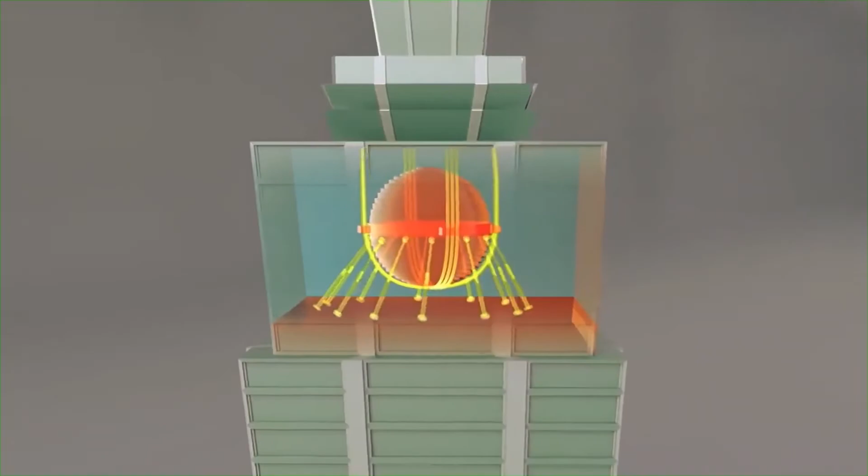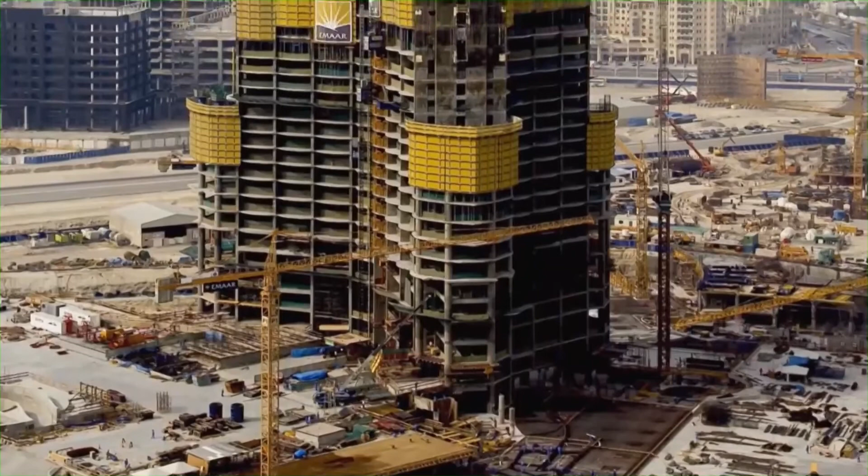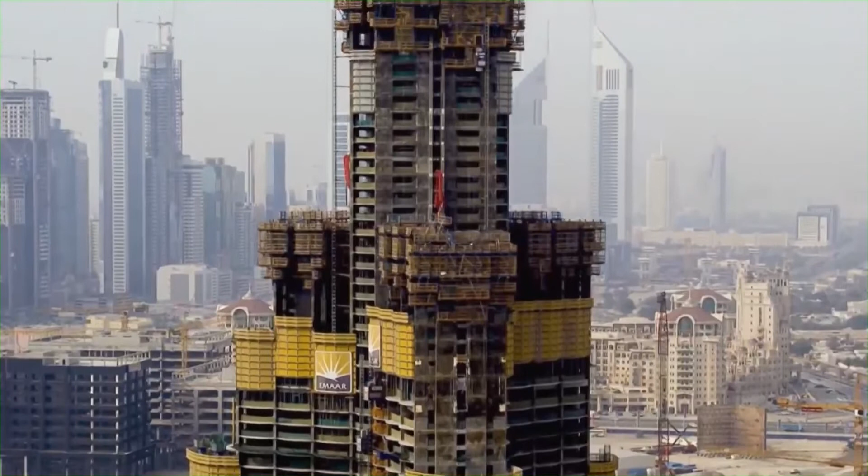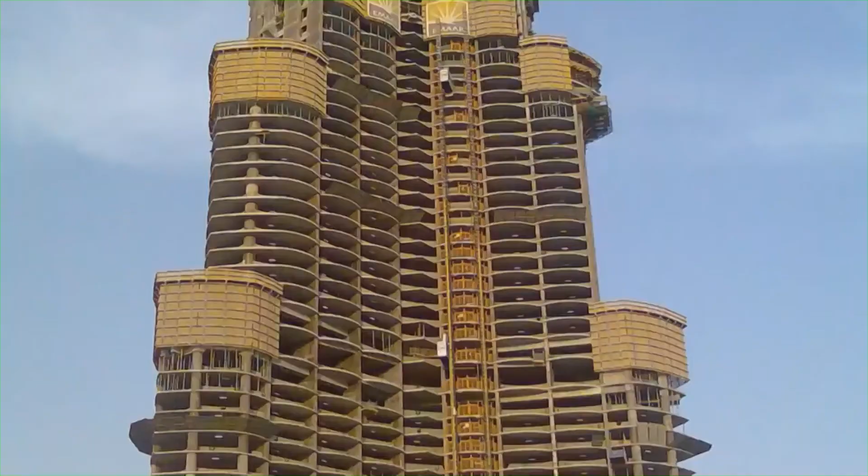The wind was not the only difficulty the Burj Khalifa had to overcome. With construction projects of this scope, even when they're extremely well thought out, there are always surprises in store. And the most unexpected sprung from an unlikely source, the building's own backers. The initial design was only 10 meters taller than the world's tallest building at the time, so it was only 518 meters tall. But during the design process, it grew by 310 meters. The structure was already up at 35 floors.

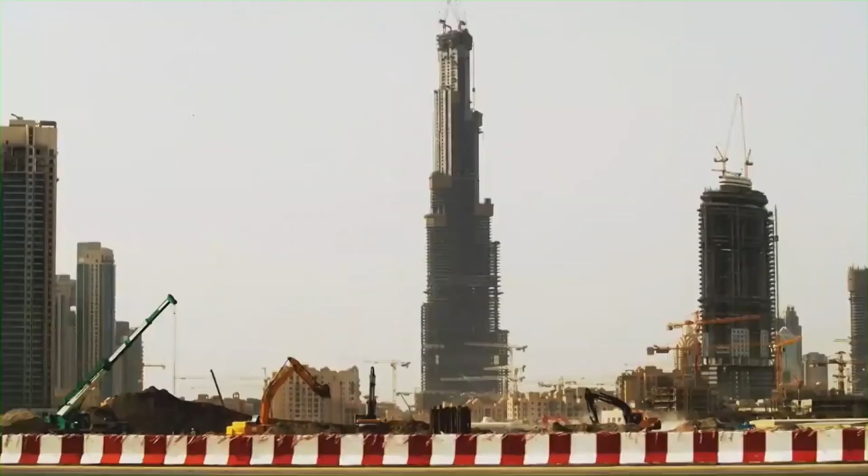The Emaar management heard that some other developers in the area were going to build another tower that was going to be higher than 700 meters. So everything was kept very quiet, but they instructed us to raise the tower height to 820 meters. So we all came to the conclusion, yes, we can increase it to 820 meters. So the design was changed, and from that period, we went on and finished the tower at 820 meters.

On January 4th, 2010, Dubai revealed a secret that had been fiercely guarded until then, that the Burj Khalifa's final height would be 828 meters. They celebrated the achievement with a spectacular inauguration. Everybody involved was very proud, and I can say, a large measure of relief. Yeah, it's like, there's a big burden taken off your shoulders. You can say, wow, I can relax now it's finished.

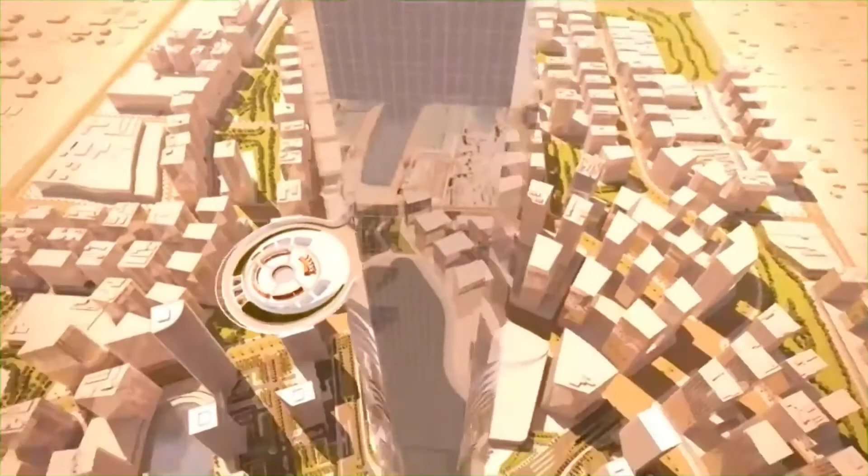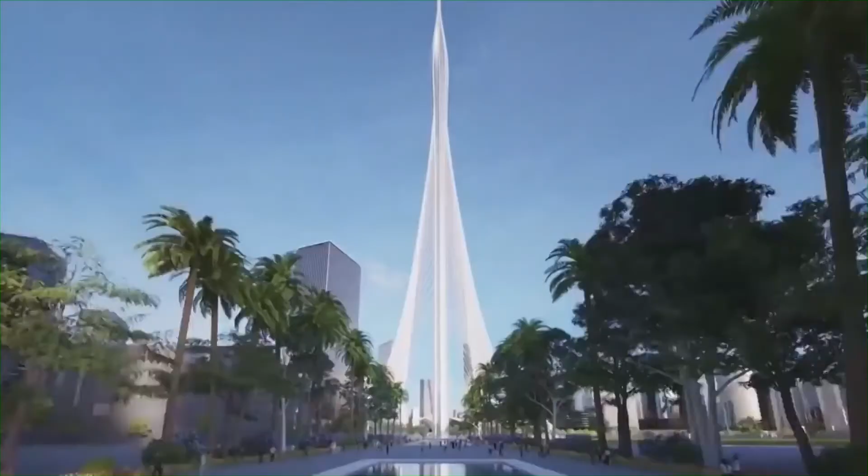Burj Khalifa is a skyscraper that has beaten all the records. But if it holds the title of highest building in the world for the moment, this will no doubt one day be stolen by another building. Already, the Kingdom Tower, which is expected to reach 1 kilometer, is under construction in Jeddah, Saudi Arabia. And if man strives to reach even greater heights, will there be physical constraints, insurmountable limits?

The only limit on height, until we get to almost unimaginable heights, like several miles, stratosphere, is financial. There is no technological limit to height. The quest for height means ego and attention. Mankind has this desire to go to the next level, to push the limit. And the quest for the world's tallest building has always been a part of that.

When you go hiking, you want to go to the top of the hill to see what's on the other side, you know? You're walking down the street, you want to see what's around the corner. And so this desire to go high is just, it's somehow, it's in our mythology, it's in our culture. I mean, why go climb a mountain? Well, we do. It's just part of being human.

At the end of his journey through space and time, tracing the footsteps of those who set out to conquer height, Richard Taillé wonders. Since, over the centuries, science and engineering have allowed us to constantly push the boundaries of what's physically possible, will nothing be able to limit man's eternal longing to reach for the sky?